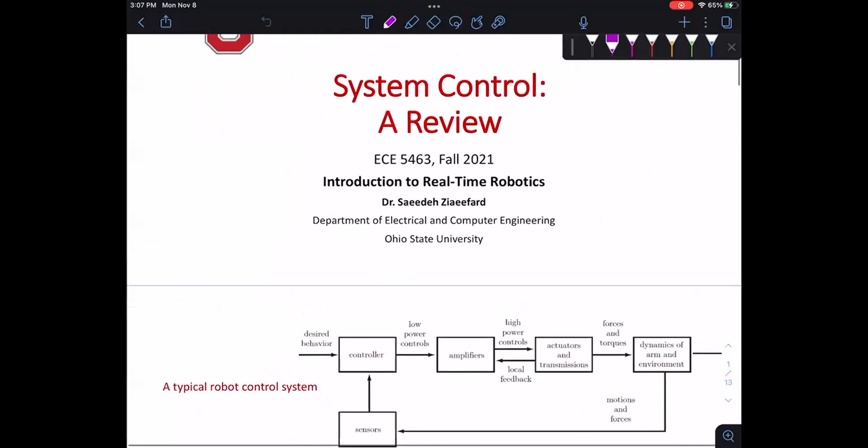All right, last class we discussed the block diagram of a robot manipulator using a controller, where the controller is. So this is a kind of a review reminder of what happened last class, just the block diagram, because we're going back into control.

So a typical robot system, it could be an autonomous vehicle, it could be a quadcopter, a system that you want to control. You will have a desired behavior, desired input, it could be anything that you desire. You can control the force, velocity, position, anything that is desired to be controlled, that's going to be your input. So you have to find the input to your system that will result in controlling that behavior.

Then you will have your controller, which gives you low power control, a signal that you usually have to amplify to go to your system. Then between your actuator and transmission, because here it's going to be a car, a robot joint, any system, there will be another local feedback between them, checking: did you send me the signal I needed to receive? Just make sure, and then the output of that goes to your system environment. The example we saw was very simple; usually a robot has noise from the environment.

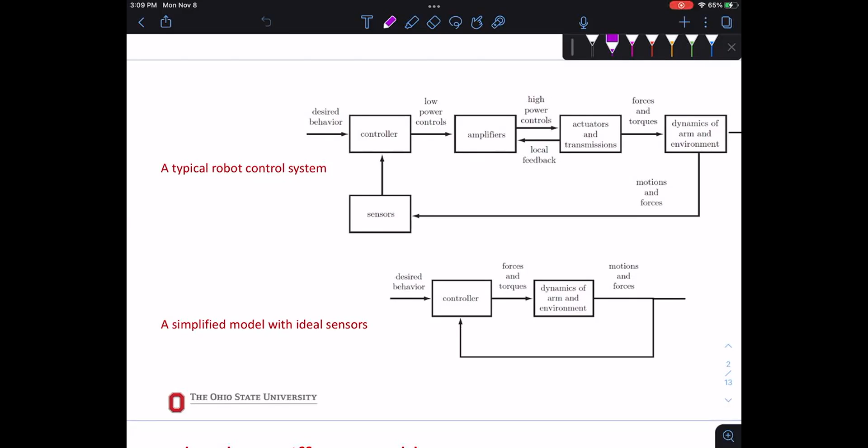Then here you have the output. So let's say this is output. This was your input, right? In an actual system, you will read your output through a sensor, right? Let's say you have an encoder on your servo or your DC motor. You believe you moved 5 degrees. You check the encoder, it tells you how much you actually moved, right?

Now this is depending on what you read from the sensor, the resolution of the sensor. You might actually move 4.5 degrees, but the resolution only shows every half degree, so it might show you 4. That's the best measurement you can get. But your model will tell you you actually moved 5, right? So there's going to be a difference between these two. So your system depends on your actual measurement, depends on the resolution of your sensor.

So you read that and you go and compare that with your reference input. Is that what I wanted? Yes. Okay, just don't change anything. Keep going in time, something might happen, and I need to readjust my controller. It's not the same. There is a difference. Okay, let's adjust things. The simple example, cruise control in your car, right?

So now think about that. That's going to be your task participation. So you're going to draw the block diagram of cruise control. But I want you to identify what the input is, right? So from human, you're the outside system, right? You're going to insert the input. What's the input applied by you? Then what happens in the controller part? Then what is your system? What's the output? How do you measure the actual velocity, speed of the car, right?

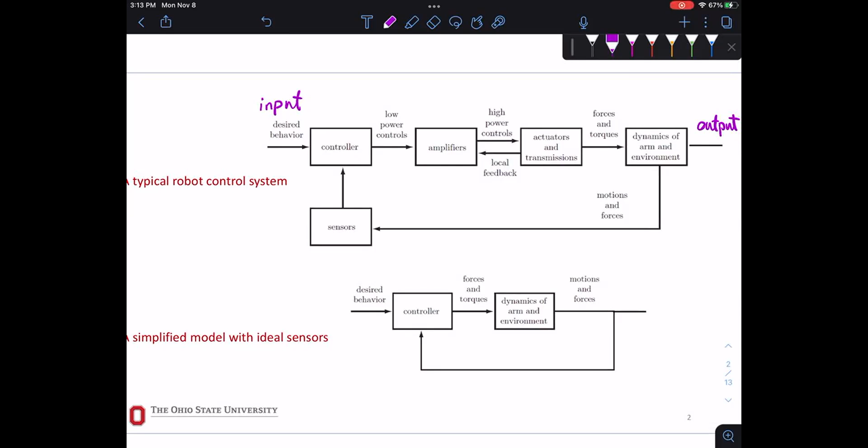I'll give you 5 minutes, 8 minutes. 5 should be enough. 8 minutes. Do not rush. Don't look online for a block diagram of cruise control. This practice is for you to prep yourself for what's coming. All right. I will grade you based on completion. So do not look online.

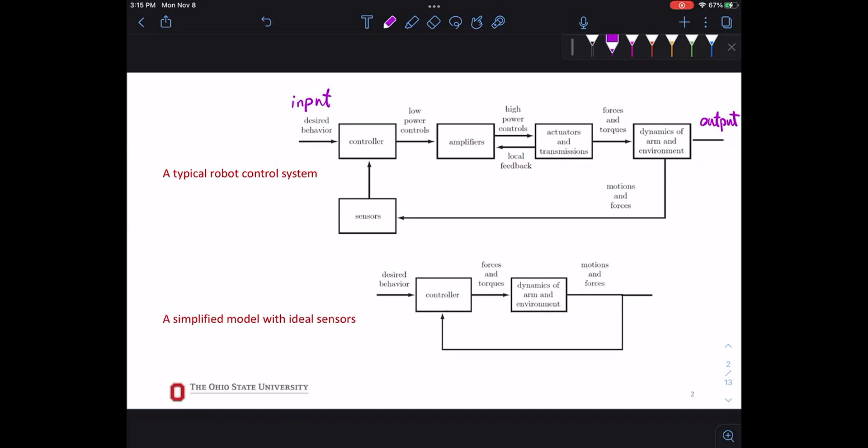You can put it here. You can. Yes.

So you have input, you have the system, and then you just simulate and find what the output is. That's the second type of problem. The third type of problem is: I have a system, I have a desired output. I want to know what input can give me that output. Then I can control the input to always get the desired value for my output, for system behavior, right?

That's the control problem. Now the thing is, sometimes to solve the control problem, you have to solve the other two. Because you don't know what your system is. You bought a robot, you have a robot, you have to model that, right?

So you assume an input, there's an output for the system, so you model. Then for every input, you have the model, you get the output. You're trying to make sure that your model works, because you probably linearize a lot of things. You want to make it close enough. Once you got that, then you solve the control problem.

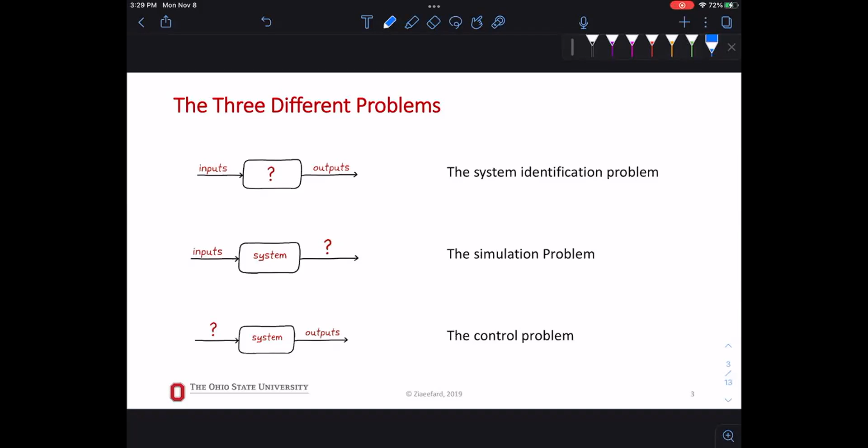Now, when we're saying solving the control problem, you usually ask yourself one of these questions. Then you know you have a control problem. You say, how can I get my system to meet my performance requirement? Or how can I automate my system? When you're automating something, you have to make sure your input always gets you the output you want, right? So you can leave it on automation. So when you ask yourself these kinds of questions, you have a control problem. It's a good problem, in my opinion.

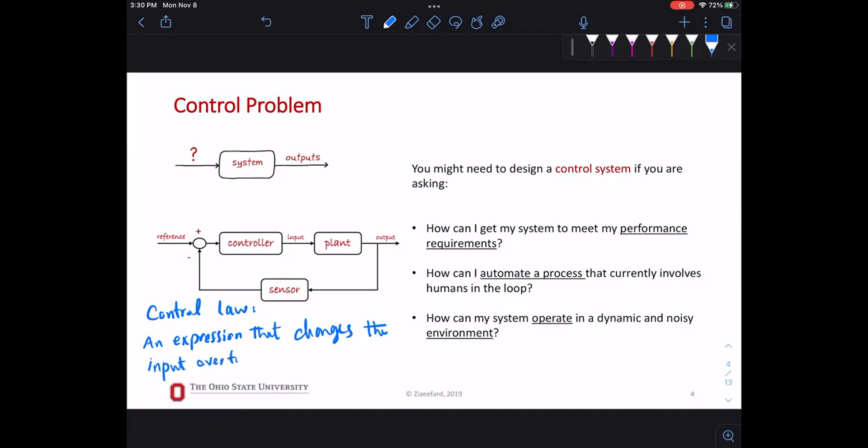Now, there is a definition. I don't know if you've heard or not, but what's the point of all of that? Okay, I know I have a control problem, but what is the outcome of this? What am I getting after solving my control problem? You're getting a control law. So you're developing a law for your input that whenever you plug in your input, you're sure that you're always getting the desired output. The control law, we're talking about this a lot, basically tells you, so it changes the input over time to achieve the desired output.

So, a simple block diagram of any system with feedback control: reference, controller, plant, output, sensor. You see that the input to your plant might be different from the reference. Reference is something you want to track. The input to your plant is something your plant will understand. Right? So if it's a voltage, it might be a force. So that's different from your reference.

Now, I see that some of you, whenever I ask about design and control, you put PID right in there, right? PID is one of the solutions. This controller, the control law, has to make sure that over time you're always achieving that desired output. Sometimes PID control is not the answer, because once you tune the PID coefficients, you leave them there. You don't touch them, right? Other controllers you can design such that over time they will change. You can use methods such as scheduling to change the values of PID over time, do some calculation and update those values.

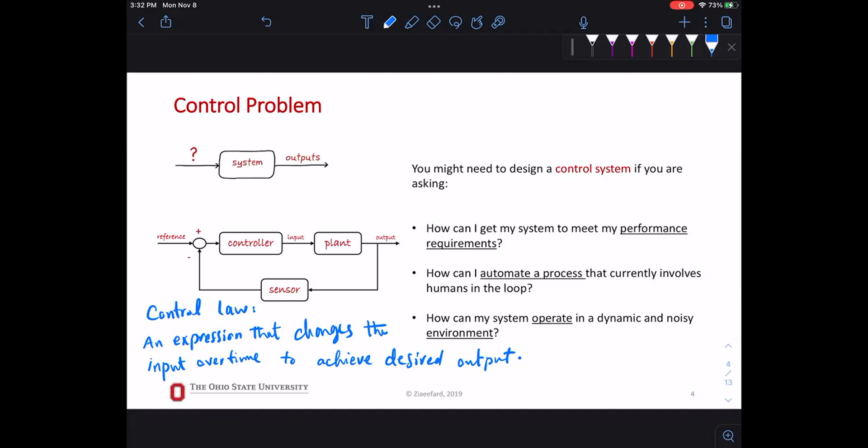You can have an observer in your system to make sure that your states are always defined properly. There are LQR, sliding mode control. There are so many different ways of controlling something. PID is desirable because the control law is simple. You can grab it anywhere online. All you have to do is calculate your error, which comes from your system, always output minus input, right? The upfront work is to tune PID, which is a little bit of work because it's mostly trial and error. Other controllers, defining the control law is harder, but once you have it, you're done.

All right. So choosing PID is one step of the control problem. So don't always go with the PID default, thinking my controller has to be great. Right? There are different compensators and controllers. Now, these are all basic and fundamental information, but I expect that now that you've heard it, you know that.

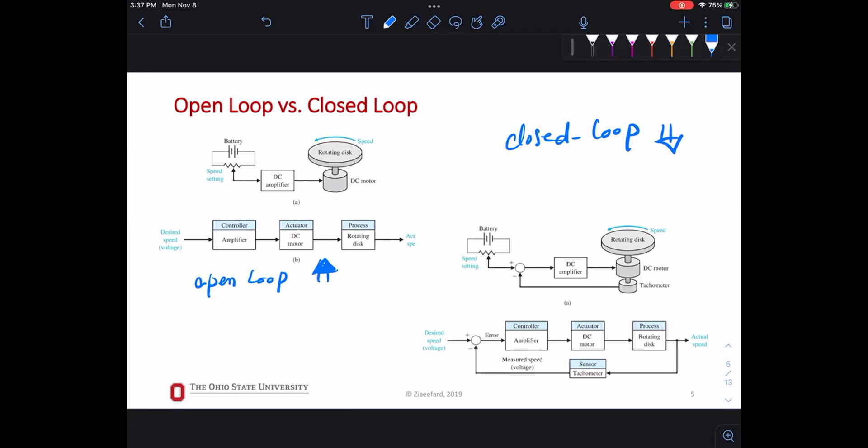So you don't always have to have a closed loop system to have a controller. You could have a controller with an open loop system. It could be simple P control, just a gain. Amplify my input by 10 times and feed it to my system, I'm good to go. I don't care. I'm sure that it will satisfy my needs. Make sense? So you don't have to have feedback to have a controller in your system.

All right. Other thing, I'm introducing this mass spring damper system because I want to talk about the system response in time. This is the simplest system, and most of us are probably familiar with it. So think about a spring, and you have a mass, and then if you pull a little bit, what's going to happen? Right? So up and down. If it is in this direction, it will stop eventually, right? Because of the gravity pull. But if it was on the surface, depending on the friction, it might never stop, right?

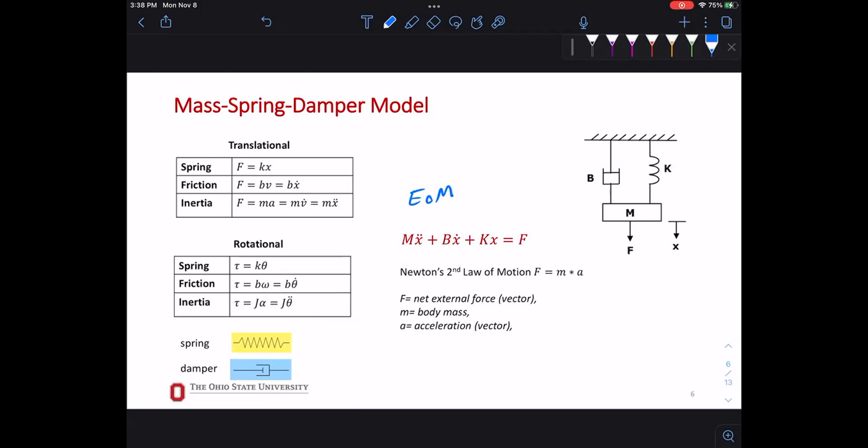So here I use Newton's second law of motion to get the equation of motion. Dynamics, we already know this. Equation of motion, so you could have translational forces and torques in rotational. I'm hoping that you're all familiar with this. If not, it's not a big deal. You're just basically going to see how this behaves. So let's say it was on the floor, so it's going to go back and forth. Let's say that I put a force F here, and this F changes with time. It's not constant. Or it could be just a constant, like you hit it with a mallet or something. All right, starts the motion.

If you measure the position of one corner and always look at that and draw it in time, so if this was position and this was time, you'll see that sine wave kind of motion until it reaches some point and does not change. When it reaches that state, what do we call that state? Steady state, right? So now, if this was a control problem, our steady state could be your desired position, right? I have a desired position. How do I change my input to reach that steady state?

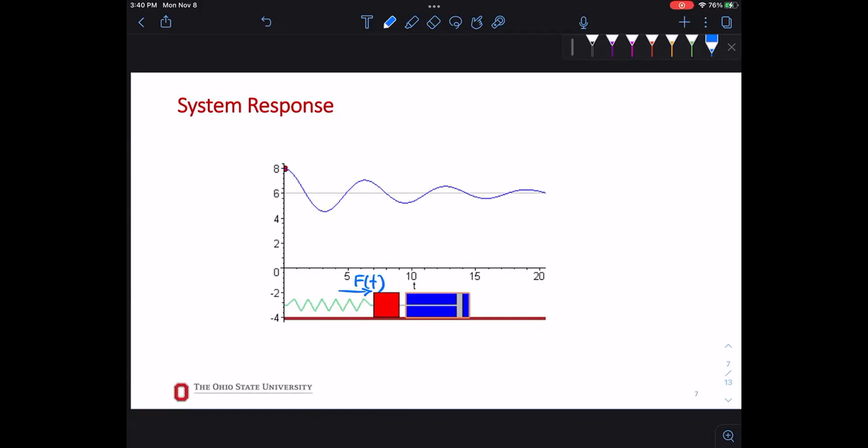And you see that it takes a little bit of time for your system to get there, right? The time for your system to get there is called transient time. So you're transitioning from the beginning of your motion to where you reach a steady state. After that, steady state, because you're not changing anymore. Right? So second order response. The response could change though. It could be underdamped or critically damped, but we're looking at, well, not worst case scenario, but what you usually see. So you have a different one, right?

Correct? Yes, this is wrong. What you have is right, and the wrong is here. I said it's the same error, but it could be YSS. So follow what you have. I'm gonna write down.

So this is the system response for any second order system. All right, I'm going to define a few values. You might have seen them. If not, you're going to use these values on Wednesday and Friday. You can always also Google second order time domain response, and you'll find all of this.

Things that are important. One is Y final value, wherever your system ends up. You can also call it YSS, steady state value. So this is your final value or steady state value. Sometimes your system might not have a final value. It might oscillate like that, right? But it will be bounded.

Then we have MP, which is the maximum overshoot. You will find it from your Y max minus your Y steady state or Y final value. So you see MP, the difference between Y max and Y steady state.

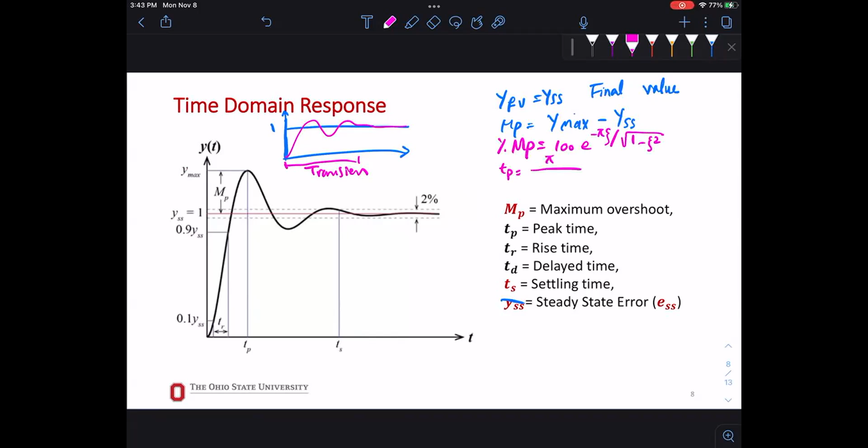All right. Then we have peak time, TP, which is going to be pi over omega n square root of 1 minus zeta squared. Do you know what omega n is? Natural frequency, right? Then we have TR, rise time. So TP is peak time. When does my system reach its peak value?

T rise time is the time from 10% of YSS to 90% of YSS. How long does it take to fill that? So for a controller you design, what do you expect this TR to be? Is a smaller TR better or a larger TR? Smaller, what does it mean? Got there faster, right? Now sometimes when this is faster, you might have a bigger overshoot. So an absolutely small value of TR doesn't mean it's a good controller.

So it's a trade-off. All of these values, you want to find them and then find the best optimized behavior for a controller. Sometimes you will get a specific value. Make sure your rise time is below this second, or make sure that TS, the settling time when you reach 2% of your final value, is below this. So this TS, we want it to be shorter. We want to get to our final value faster, right?

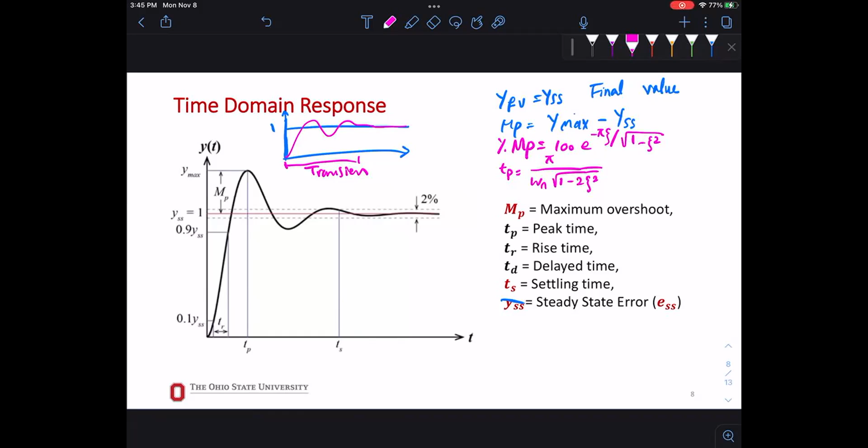But if this coming toward the left makes a very large overshoot or lots of oscillation, you might break our motor, for example, because it's jerking back and forth, right? So designing a controller is basically looking at the behavior of the system. It's a little bit of trial and error, to see by changing the controller how your system performs. So this plot becomes really important when you are looking at system performance or behavior.

Now, this is something that we're going to work on, and you will see on Wednesday there will be a quiz about this. The quiz will be slightly different from this, but solving this should help you to be able to do the quiz on Wednesday.

So you have an open loop system. You have a reference of R. You have a controller that has a gain of 1/10, just a gain. You'll see later that this is a P controller, it just has a proportional value. Now you have U input to your plant. Then you have Y, which is your output, but you also have a noise coming to your plant and going through a gain. So that part is what we design.

You say, oh, that's the kind of environmental noise I see. I can model it as a noise always going to the block with this gain. Now you have different ways of designing noise, right? And we will model that noise based on our environment, all right? Now, we want to find the control loop error. Control loop error here is input minus output.

I'm breaking the steps so it's easier to do. First thing I want to know is what is this U? I want to know what is the signal going into my plant. U is R, this signal value, times the gain. So this is R over 10.

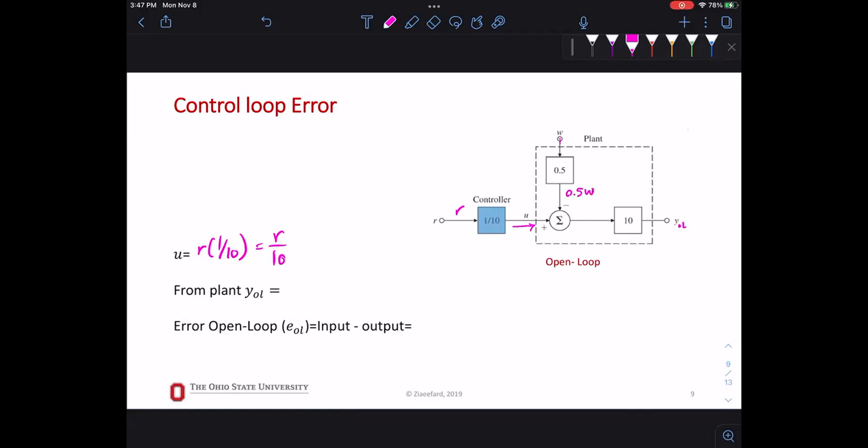Now, from the plant, Y OL is... I have W signal times 0.5. So this is 0.5 W going to this summation with negative. U goes in here with positive sign. So U minus 0.5 W going into a block with gain 10. And I know that previously U was R over 10. So R over 10 minus 1/2 W, times 10, which is R minus 5W.

So this is YO. I calculated YOL from my plant. Now, what's the error? Input minus output. Input R minus 5W, R minus R plus 5W. So error is going to be 5W. This cancels out, so you see that the error in the system depends on the noise.

If you design a controller, you want to get rid of that noise, right? So you come up with a controller that will get rid of that noise. Make sense? Yes, that's what you're thinking about.

Exactly. Now, if this was a closed loop system, all you have to do when you're calculating is find out what values go through the signals to the summation point, then find input minus output for your control, your error.

Question? Your desired value minus your actual value. So here we don't have any feedback, right? So our actual is the output here, Y OL is the Y.

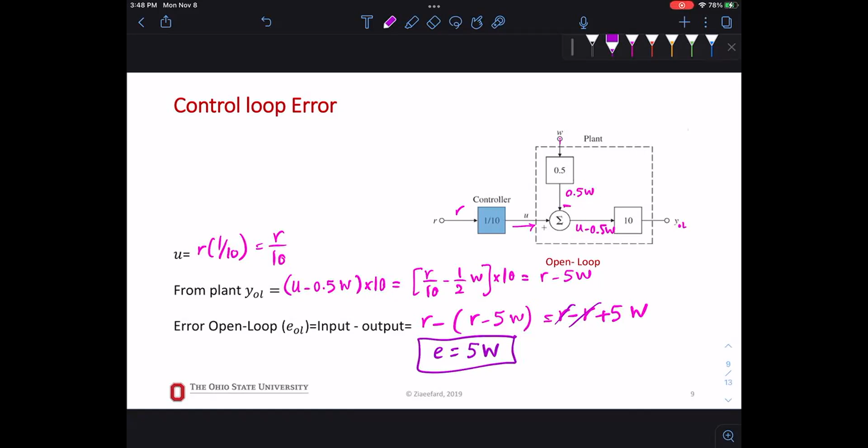All right, so this is basically explaining the error dynamics. So kind of jumping back into robotics, what we discussed before.

So if you have a joint and you have a desired theta for it, you want to find out how much error you have. You say, this is my desired theta. I'm measuring the theta, which if you're using a motor, you probably have an encoder. So the actual value is what you read from the encoder, or if you don't have one, you use your model and see what's the output from that model. So the desired minus your actual is going to be your error.

Now, desirably, we want the error to be 0. So we will write the controllers in a way that the error will go to 0. That will be the purpose of designing any controller.

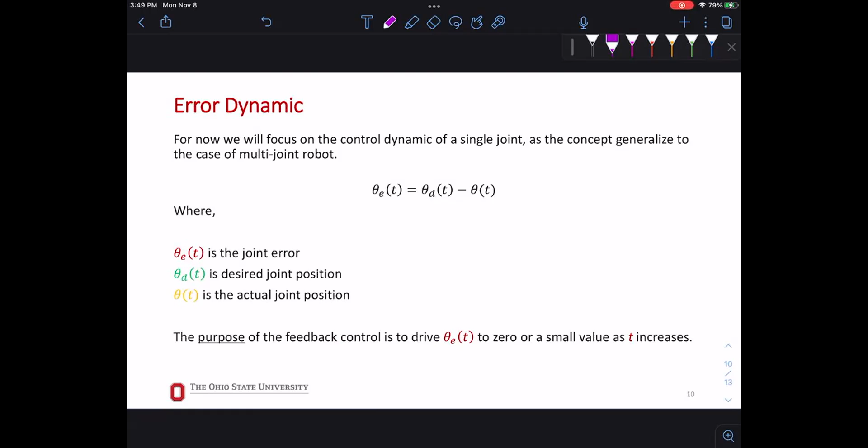So we looked at the system response, right? Now, when we are designing a controller, we are actually going to look at the error response. So what do you expect the error response to be based on what you saw from the system response? The system started from 0 for a value, shot up, then came down and back to your desired value, which is 1, for example, for a step. So what do you expect to see if you plotted the error response?

Let's say you have a non-zero error at the beginning, Michael. They will fluctuate with time. Okay, Cam, did you want to?

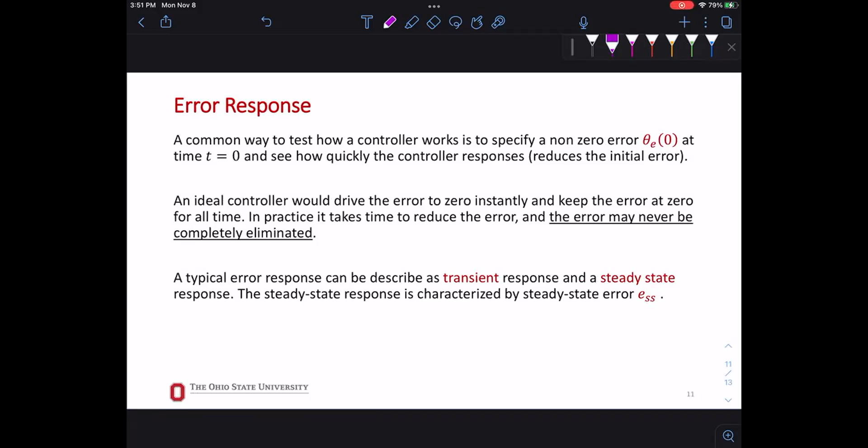So between the both of you, when you have a non-zero error, you start from a value that's not zero. The goal is to go to 0. So you're going to drop, maybe overshoot a little bit, go back up, the controller is behaving, and then until you get to 0. So kind of the flip. If your error mirrored your time response, just the way it looks, you're starting from a non-zero value and your goal is to get to 0.

You will usually have this overshoot. Now it looks like undershoot, but it's not, because it's the beginning of your system. Now the goal is to reach from this point really quickly to this. So that's the controller that you desire, right?

But sometimes getting something like this is very expensive, in time and cost. You need a very strong motor, for example, to get there. So sometimes a controller that looks like this might actually not be a bad thing if it costs you $100 instead of $500 per month.

Understanding how my error response should look is really important. That will help you design an optimal controller. Let's say you're using PID because it's the easiest to design. Again, you're doing this to understand how our system will behave. I haven't talked about any controllers yet. All systems behave like this. All controllers behave like this.

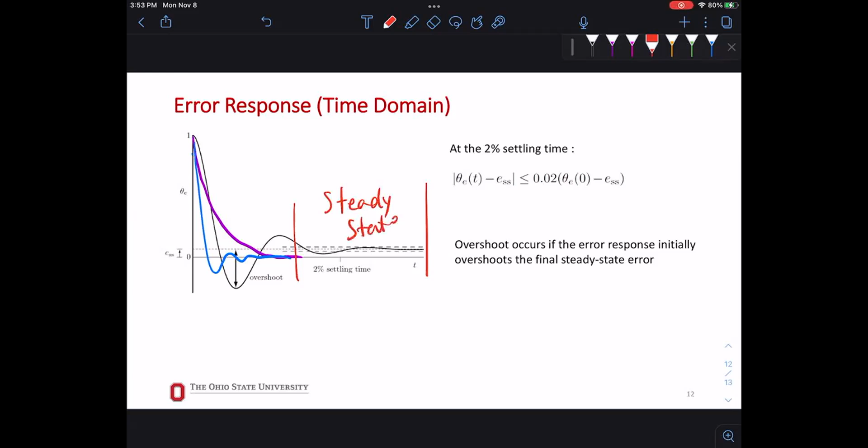So to just finish up, this is the part. After you reach, we usually say that if you reach the 2% settling time, you're done. So this part is your steady state, and this part is your transient, things that happen in transient.

So when we discuss our PID controller on Wednesday, you'll see this show up again, and we'll use this plot to find specific characteristics of our system.